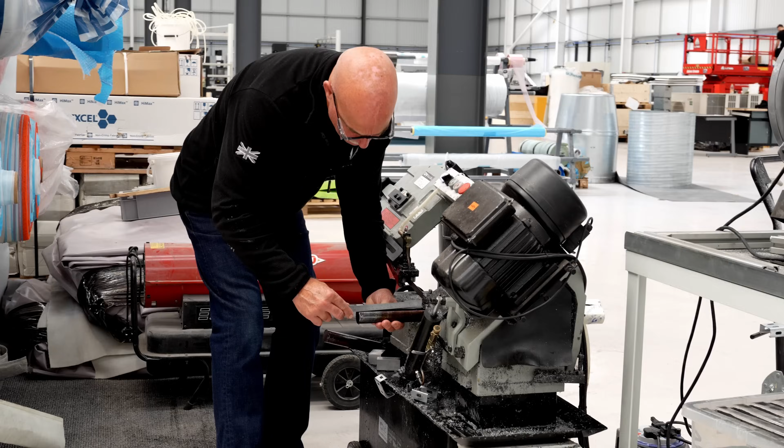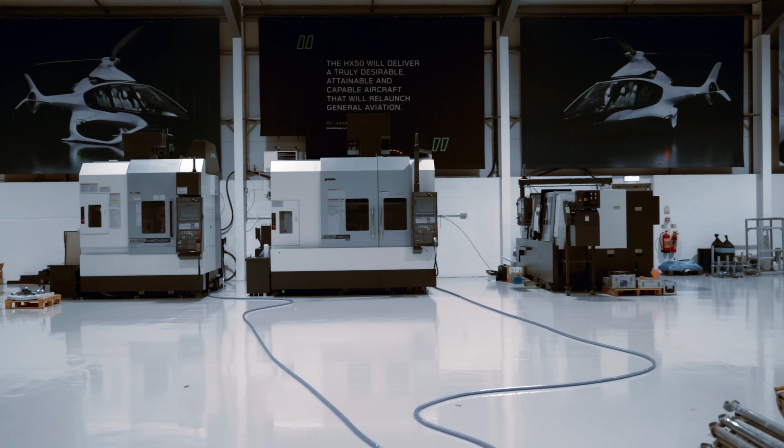Hard to believe, really, that just 3 years ago, a handful of us moved from a tiny, cramped office full of computers just up the road into a completely empty industrial unit that would become DC1. In here, in just a matter of months, we built our entire facility, we built our team, we built our precision temperature-controlled machine shop, our avionics development center, our metrology lab, our power electronics lab, our design suite, our development suite, and all of the other facilities that we've needed to develop HX50 and GT50.

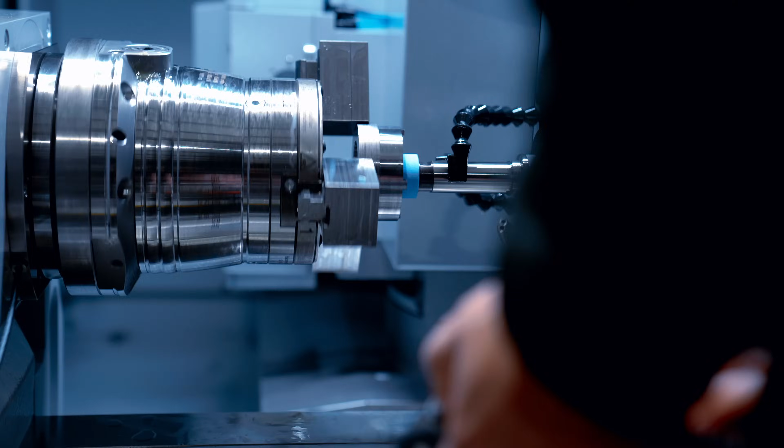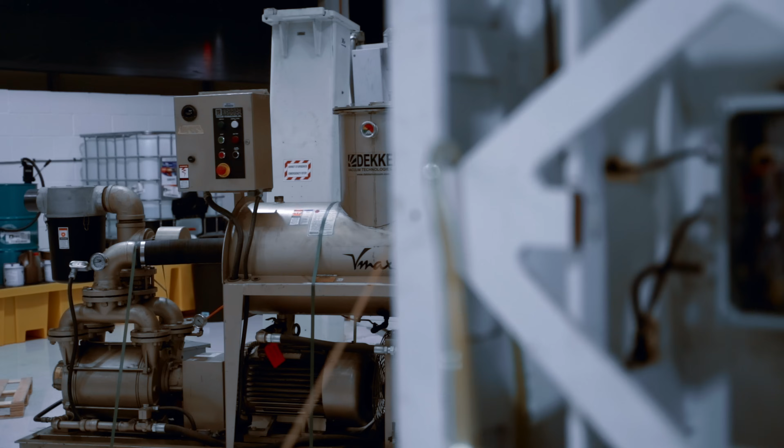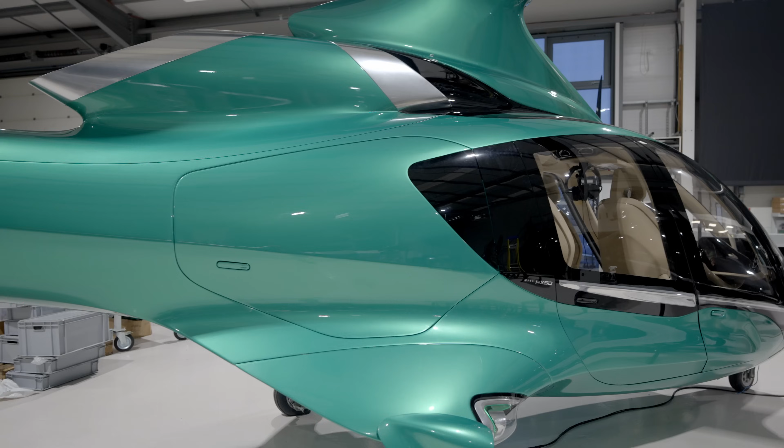With those facilities, we developed the capability to make aerospace quality gears, aerospace quality bearings, all of the components necessary for GT50 and all of the power electronics and software capabilities. But very quickly, we ran out of space again. Within just a year, we'd opened DC2 and DC3 that enabled us to make composite molds, composite patterns, infuse full airframes, all of our laminating capabilities, and eventually produced 2 HX50 airframes, fully fitted and ready for public display.

But again, we're now running out of space. The team's growing, the facilities are growing, and it's time to step it up again.

Welcome to PC1, our brand new 76,000 square foot production facility right here in the heart of Stafford. We now have the entire Hill team based here under one roof, all of our design staff, our development staff, our production staff, and our admin support staff as well, all here working under one culture with one key goal of getting the development finished and the aircraft into production. Within this facility, we will complete all of the development, all of the approvals, and then commence early series production of HX50. And beyond that, the facility will become one of the elements of our modular approach to production.

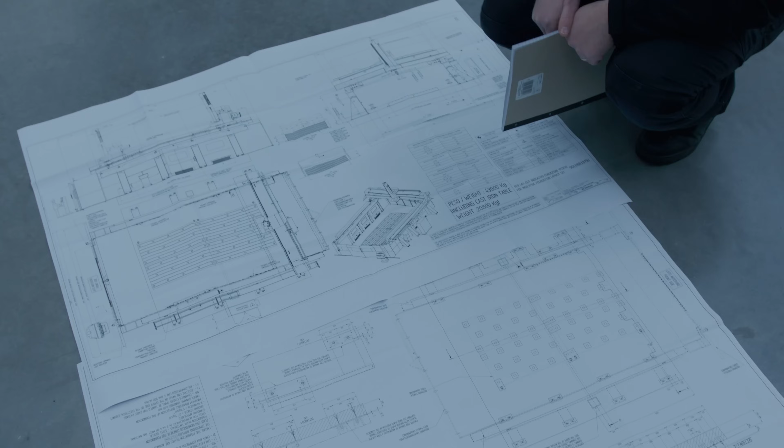These facilities don't build themselves. We've started again here with an empty box, albeit a bigger box, but we've now got to go ahead and build yet another helicopter factory. So over the course of the last few months, we've been essentially completing the design and development of our production facility for the early prototype aircraft and then the early series production aircraft, laying out the factory floor, laying out all of the other facilities that we need in here for design, development, approvals, all of the business administrative functions, customer care and support. All of that has now been designed and we're in the process now of implementing it.

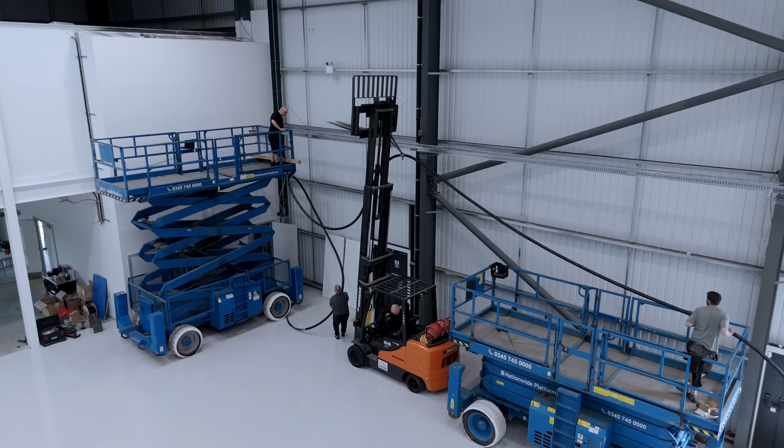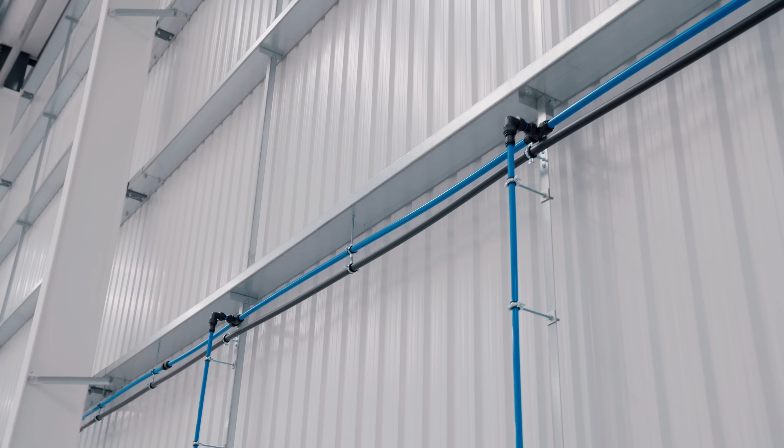So if we take a look at the shop floor first, then from an empty box, we've had to add all of the electrical power infrastructure needed to locate this big, heavy-duty industrial equipment that we need. Large, heavy-duty cables running the full length of the factory, similarly with compressed air lines, with water lines, and all the other services that we need to support the wide array of manufacturing equipment that we need within the factory.

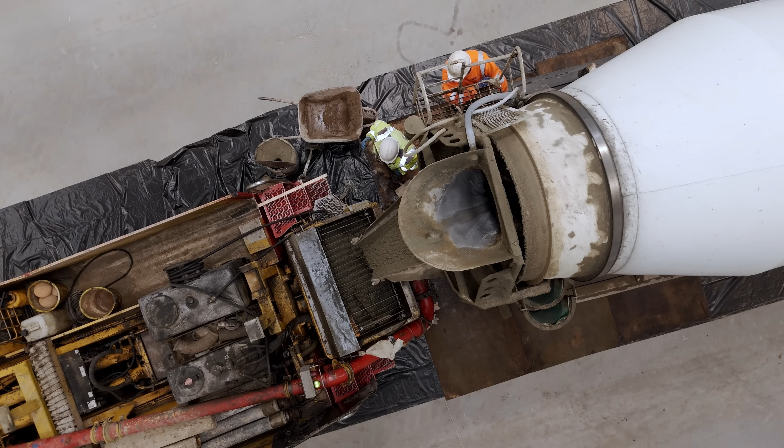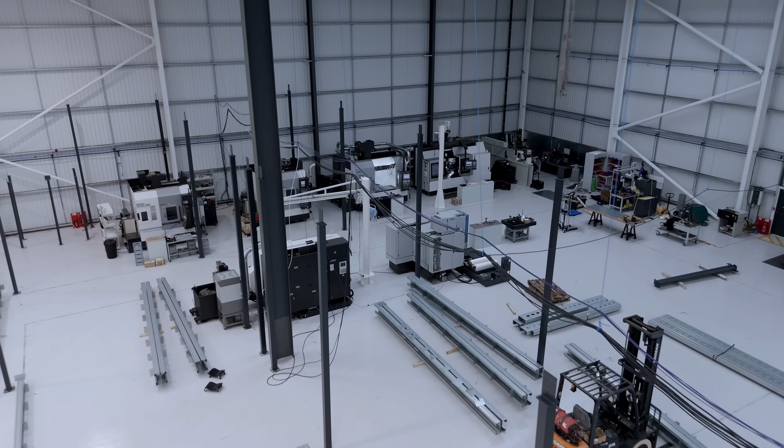In addition to that, we've had to lay down specialist foundations to support the heavy production equipment that we've installed here at PC1. The large gantry mill, this is a 15 by 15 meter machine, that has a specialist foundation and specialist ground attachments, as well as all of our precision CNC machines that you've seen before at DC1. All of those machines have had specialist foundations implemented here. We'll shortly be completing our mezzanine floor to create an environmentally enclosed chamber around them to hold those temperature controls that we've shown that we need to hit the tolerances for gears and bearings and other precision components.

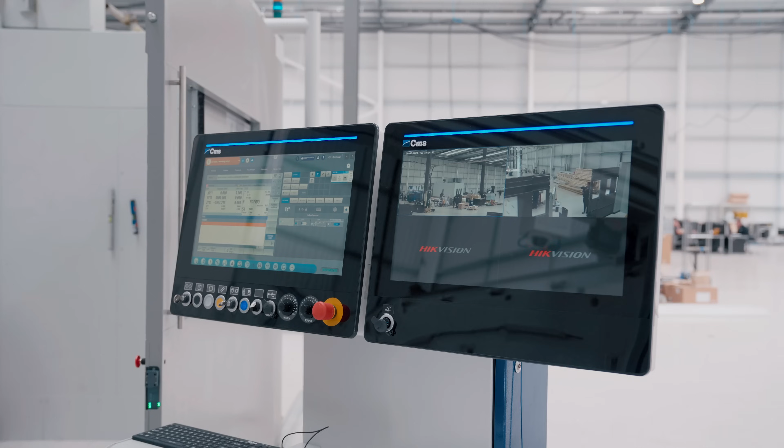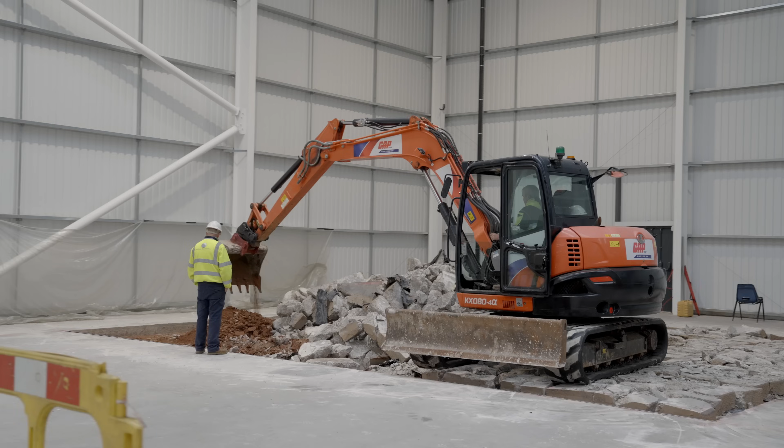This is our all-new composites gantry mill. Arrived from Italy in 5 articulated lorry loads. It's taken a team of engineers 6 weeks to painstakingly build it. It sits on a trench that we excavated 1 metre deep to build a machine foundation strong enough and stiff enough to support the bed and the pillars to maintain the accuracy and the tolerances needed to produce accurate composites, patterns and moulds. It requires a complex web of electrical, pneumatic and control services fed to it from around the factory to control its many systems.

It creates its own environment to contain all of the powder and dust that it makes as it manufactures high quality patterns and moulds from powder-based, polystyrene-based and model board-based materials. And then it has its own dust extraction system that pelletizes that waste and keeps it all out of the factory, avoiding contaminating the clean areas of the rest of the production facility.

Why would we go to such extreme lengths for a machine like this? It's quite simple. If you want to control the cost of your composite components, you have to control that process from end to end. You have to be able to make patterns, molds and parts all the way through to finished painted goods if you want to truly control the costs.

And to do that, if you're going to make big composite parts, you've got to make big composite molds. If you want to make big composite molds, you're going to need to make big composite patterns. And big composite patterns require a massive gantry mill.

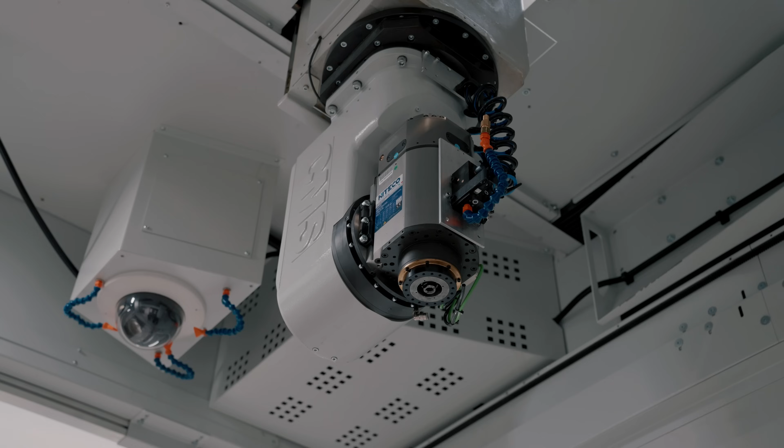As you can see, it has a modern high-speed spindle. We have remote monitoring of the machine, as well as computer controls from external stations, and we have a modern 16-tool tool changer. What that means is whereas previously we'd have had to stop programs to change tools, with this machine, we can now do everything from roughing through to the sculpting of the surfaces, through to picking out intricate details and fillet radiuses, all within a single program, all within an operation, all lights out overnight.

So what that means for us is both in terms of patterns and molds, we can take simple, low-cost tooling materials, such as the materials waiting to be processed over here, our conventional polyboard for the big patterns that we make, and higher grade model boards and foams, low-cost composite materials in through the front door, high quality, precision aerospace patterns and molds made in-house, right here, production ready at PC1.

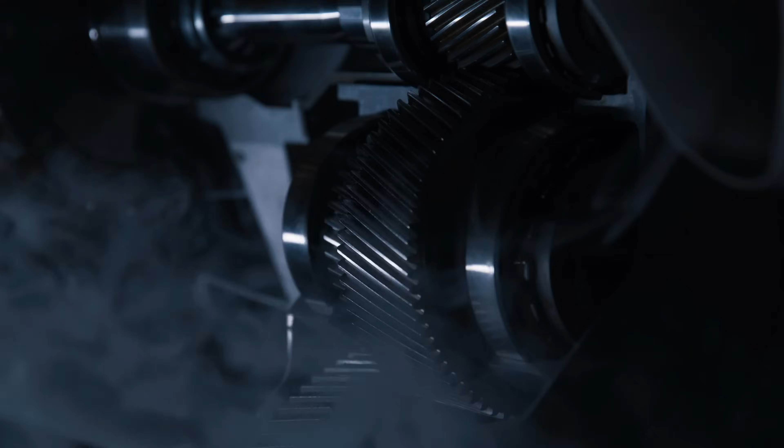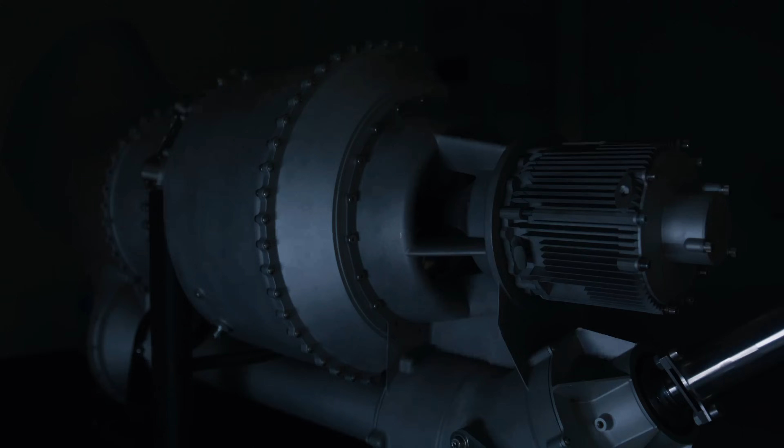Let's talk about GT50, the heart of HX50. So the primary focus of the engine team at the moment is getting as much of the developed hardware onto the test bench as early as possible to validate and prove that each of the elements of the engine are working as designed and as intended.

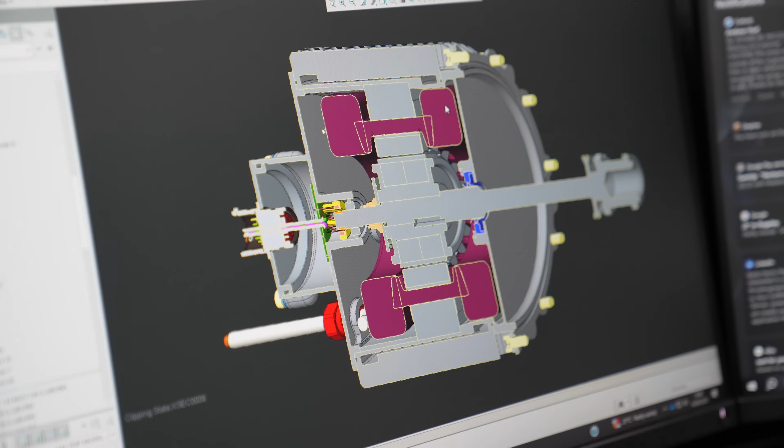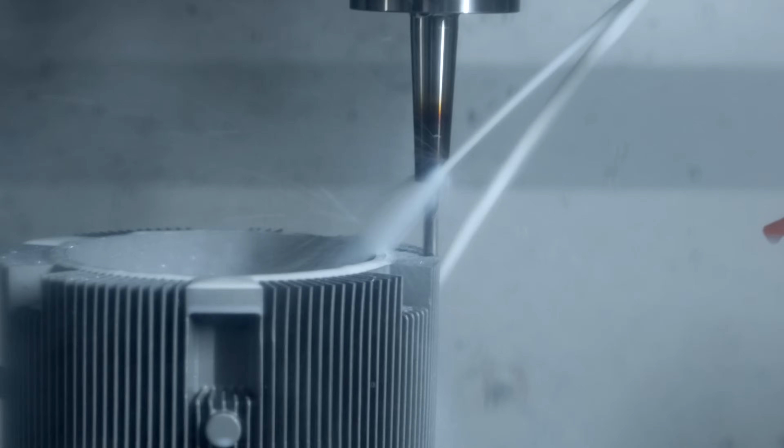Over the course of the last few weeks, we've reported that all of the internal elements of our starter generator unit have been manufactured. All of the electrical components, the stator, the rotor, the magnetics, the coils, all of those things have been produced and are now ready to be assembled and tested. We've been producing the external casing components here in-house, and now that we've got the machine shop back online, those final components are now trickling through.

So we've got the main casing, the end cap and the front cap. These in production are cast components that then have second stage machining operations on them. For the purposes of the first prototype starter generators, we've rapid prototyped as an analogy to casting and then machined those right here in the new PC1 machine shop.

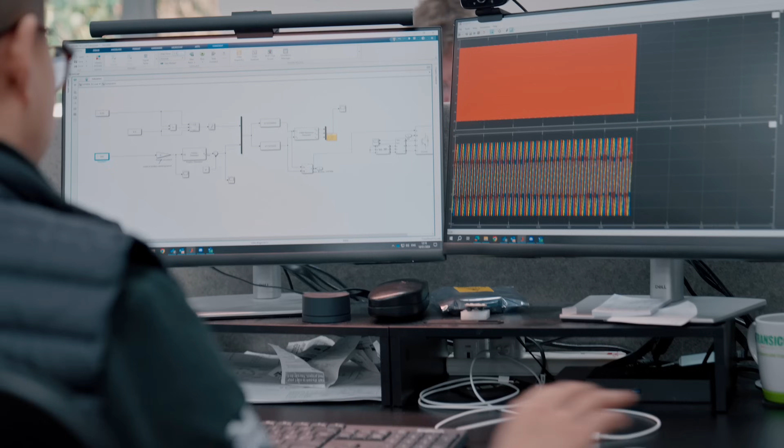So the last of these components will be going through the facility over the course of the next week or two, just in time for our high-speed test bench to arrive and be commissioned just over there in the development test area. Once we've got the test bench operational, the first starter generator for GT50 can be fired up and tested throughout its entire operating range, along with the power management unit that controls and manages the starter generator and chops up and reprocesses all of that high voltage, high frequency AC electric that it generates back down into usable 28 volts DC.

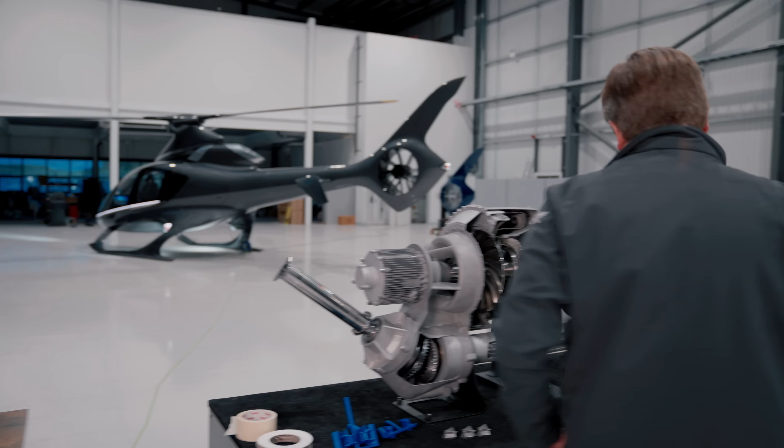If we then talk about the speed reduction gearbox, the next area that we're pushing through the machine shop at the moment is the speed reduction gearbox that takes power from the power turbine at 35,000 RPM and brings that down into a more usable 5,000 or 6,000 RPM.

The challenge with the gears is because at the moment we're still relying on external subcontractors for some of the plating and hardening processes. This is actually a 16-week manufacturing process to get the gears done. Over the last month or so, all of these gears have been released out into production. The blanks have been prepared and these are now busily off being copper plated ahead of coming back to us for tooth cutting and then subsequent hardening.

With the gears and the casings and the shafts all released, the guys have then turned their attention to the test rig design for the drivetrain, because as soon as that gets here, this will be built up and we have to prove that that speed reduction gearbox can stand up to the duty and the performance that we need before we can run it with the whole engine as a system. So we're currently developing a system where we can wind that gearbox up and essentially run that throughout its entire operating life to validate the life of the gears, the bearings, qualify the lubrication system and validate the overall performance and strength of the system.

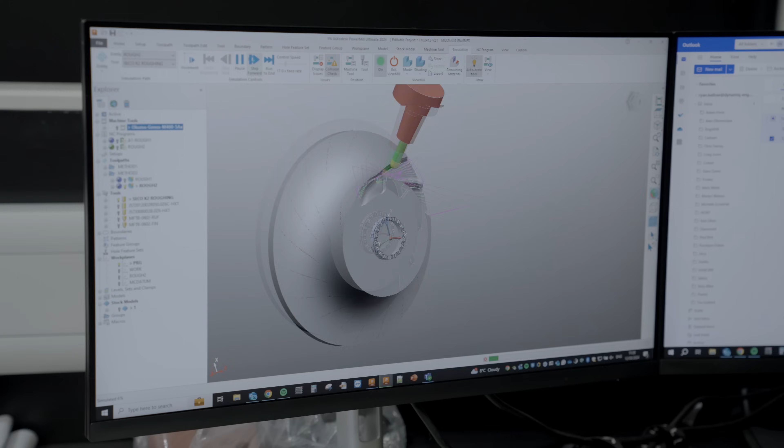While Craig and Rob have been focused on getting the speed reduction gearbox out of design and into production so that we can produce these components as fast as possible, the remainder of the team have been focused on the core of the turbo machinery. The compressor impeller has been ready for some time now, and we're really now just waiting for the climate controls to go back into the machine shop so we can do the finished machining operations on the turbine ready for test. The compressor disc and a lot of the core shaft components have been mature for some time, and again we're really just waiting now to get the machine shop back online to be able to produce that.

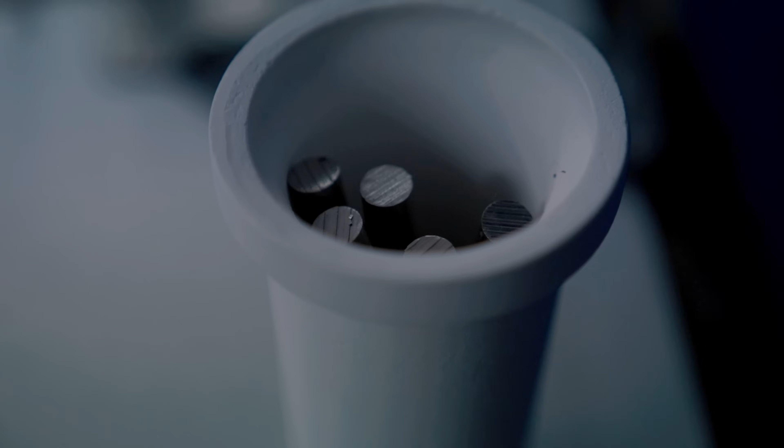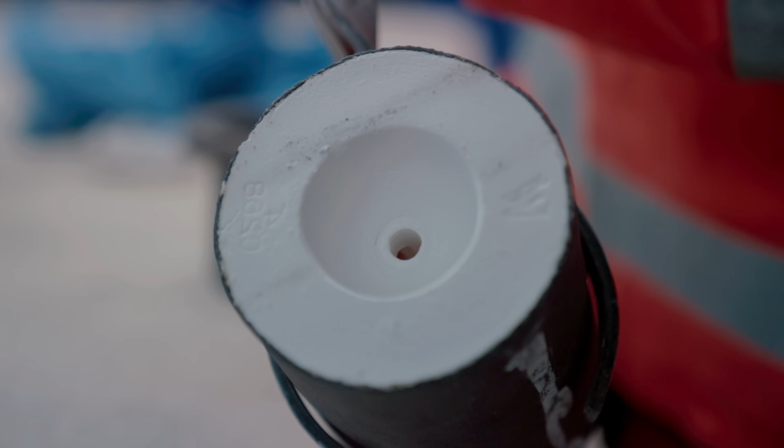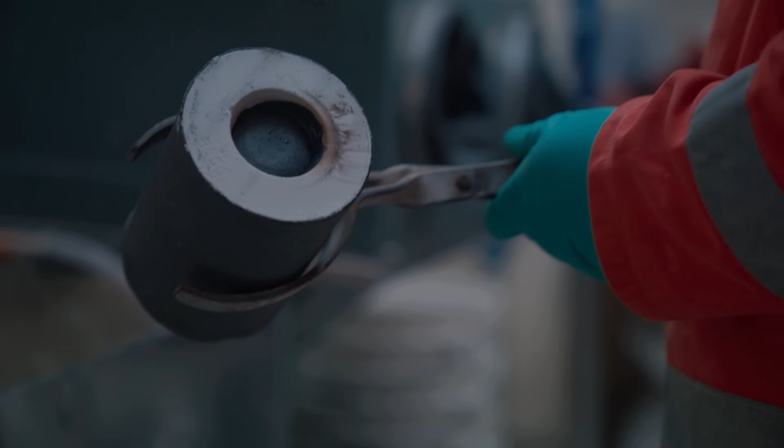One of the areas that's developed extremely rapidly over the course of the last month or so has been our in-house casting processes to produce high integrity super alloy cast turbine blades. Casting's a pretty horrible process in principle. The idea of pouring molten metal into a mold which is flowing turbulently and entraining all sorts of horrible stuff with it, controlling that is not a simple thing to do and requires a lot of careful design of the process. What we've been doing over the course of the last couple of weeks in particular is refining the filling system that allows us to very smoothly and cleanly get high quality metal out of the crucible and then down into the filling system through a series of filters, and then to gently and smoothly fill the blade cavities to create good quality defect-free turbine blades.

In order to do that, we've had to do extensive design work on the filling system, the integration of our molds with the actual casting machines that we're purchasing to produce these things. We've had to develop specific high temperature seals and gaskets to be able to seal the mold cavities to the casting machine itself, and then we've been doing an extensive amount of work on optimizing the process parameters itself, including tweaking the moulding temperatures, tweaking the superheat temperatures, and controlling all of the temperatures and timescales that are necessary to control the casting process to the tightest of details.

In addition to the core development of the process, we've also been equipping PC1 with all of the equipment necessary to cast turbine blades in-house. So we've now received delivery of our first casting furnace. This is a mould heating furnace, and what this allows us to do is it allows us to heat the moulds that we use to create the turbine blades to really high temperatures to ensure that the liquid metal remains liquid long enough to fully fill the casting cavities within the moulds.

In order to do that, we've also created specific flasks and all of the arrangements to attach our moulds to the casting machines, preheat them in the preheating furnace, and then the apparatus to transfer them into the casting machine for pouring, filling, and cooling and solidification. Clearly this furnace isn't big enough for production. This one, once it's finished its development tasks, will become part of our quality procedures for checking various elements of the casting process. We've simultaneously ordered a much bigger unit that's capable of producing the volume of blades that we need to in early production.

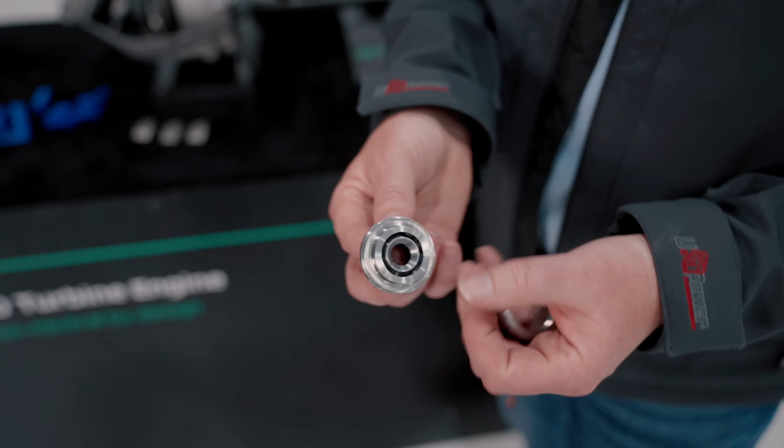One of the areas that's received extensive testing over the course of the last month or so has been the integration of the fuel nozzles with the swirler system that promotes a swirling turbulent flow at the back of the combustion chamber. This flow is intended to create a stable recirculating flow back here that promotes the ignition of the fire from one fuel injector to the next all the way around the annulus, and make sure that that heat remains at the back of the combustor where fresh fuel is consistently injected.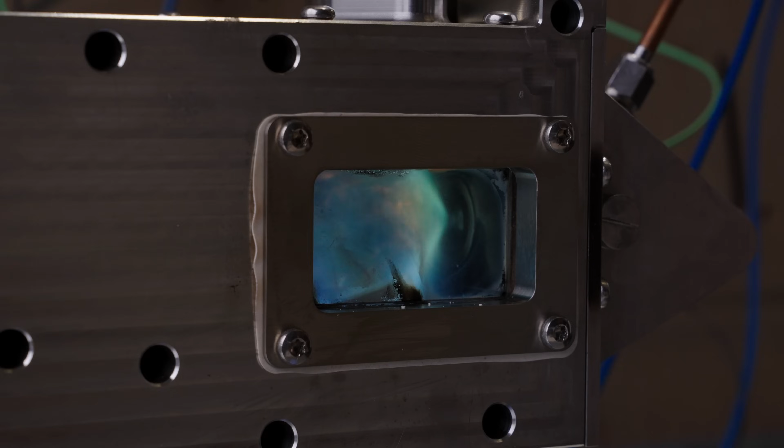That same turbulence then propagates down the combustion chamber and allows the mixing of the dilution air that comes in through the large holes in the surface of the combustor to create a nice uniform hot gas stream to feed the compressor turbine. This work has involved a combination of extensive, sophisticated simulation work and a lot of basic testing back on the bench to verify that what we see in the simulations is what we're getting in the engine.

Off the back of this work now, we have a robust swirler design. We've managed to improve the flow around the combustion chamber so that we get as uniform a flow as is humanly possible within the constraints of the packaging, and we've got a nice stable flame giving good flame temperature, good metal temperature, reliable ignition and reliable stable combustion all the way through the range of operations that we're able to cover on the first rig.

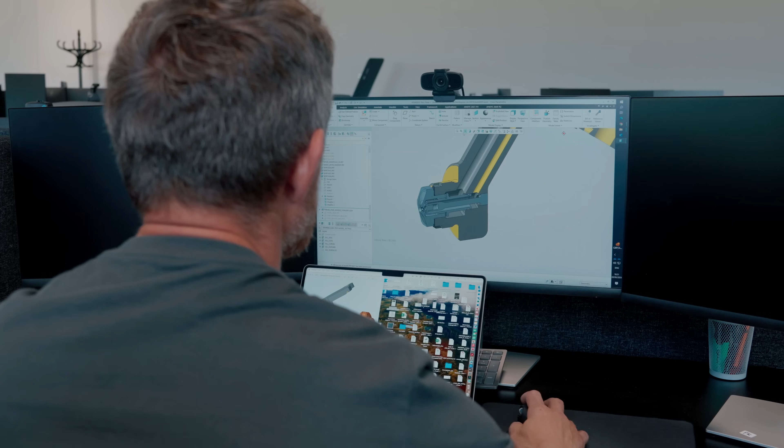In addition to the optimization of the swirler arrangement, we've now also completed the development of a duplex nozzle. A duplex nozzle is a nozzle system that takes two simplex nozzles and combines them in a coannular arrangement. Now, why that's important is because in order to get effective atomization at the low fuel flow rates that you need to start the engine, you need a much smaller nozzle orifice than you do for delivering all of the fuel that you need at the high power end of the engine.

Now, to make that work uniformly and smoothly across the operating range, we've combined these two things into a duplex nozzle arrangement and packaged that within the swirler that's required to create the stable combustion at the back of the combustor. Pavel's developed the geometry for that, and we're currently going through the first stages of producing the very first production grade combined duplex nozzles for the engine. These are the nozzles that will run in the second set of combustor tests and in the full gas generator tests.

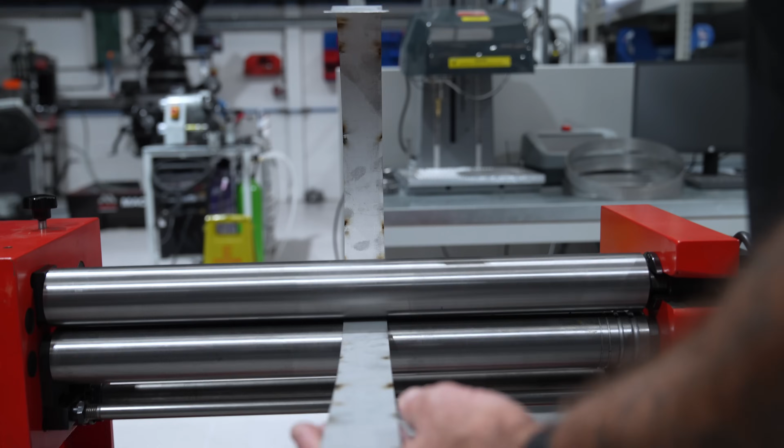You've followed us producing the annular combustor over the course of several months now, and this is one of those components where it's relatively difficult to develop all of the processes that you need to create all of these rolled profiles, pressed profiles, spun profiles to the tight tolerances in the extremely tough materials that are used to survive in these extremely aggressive environments. We finally managed to finish the last of the difficult components that was proving very challenging to form, and we've now produced all of the components necessary to make a full annular combustor.

So the next stage for this is to produce a set of these components, set them up in the rig that we've shown you previously, and then we can go about essentially creating all of the welds between the individual leaves to turn this into one solid annular body, ready for drilling, ready for the installation of the fuel nozzles and for testing on the rig.

So, next steps for the GT50 program. With the last components for the starter generator going through the machine shop as we speak, and the test rig for the system on its way to us, ready for installation right over there in the test area here at PC1, our very next task will be to get the starter generator and its control system, the power management unit, on test and working properly. While that's going on, we'll be completing the build and then the testing of the speed reduction gearbox and the entire GT50 drivetrain, qualifying that for running both with the whole engine and then later for flight tests.

While that's been going on, the team is extensively focused on getting the last few components of the combustion system working and the whole gas generator on the bench and running, generating 500 horsepower. And that will then lead on to getting the whole engine working and running as a unit for the first time on the test bench.